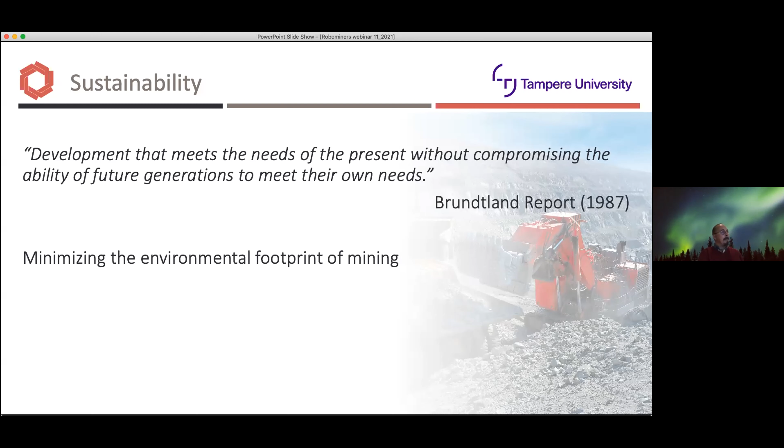So what does this all mean to mining machinery? Of course, if we think about operations the machinery does in mining in general, how to improve the sustainability.

One way is to minimize the infrastructure required to operate the machinery. There is usually in the mine a huge infrastructure which is just supporting the operations in the mine - ventilation, pumping, and so on. One way is to minimize the waste, so that we excavate as little waste rock as possible, and produce as little other waste as possible. Then, of course, minimizing the environmental risks - in general, not bringing into the mine anything which causes some kind of environmental risk.

This also means certain things in terms of machinery life cycle. We have to consider the life cycle more thoroughly - think about the reconfigurability of the machinery, how the machinery of today can meet the needs of tomorrow. If our operation changes, how can we change our machinery to meet new requirements? Then reusability - when our machine reaches the end of its usable life in our mine, what will happen next? Can it be reused somehow, and for what purpose could it be reused?

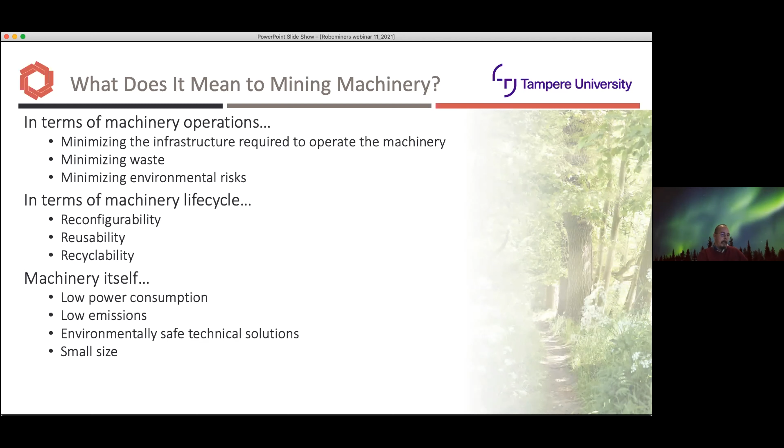One key thing here is also small size. The smaller our machinery is, the smaller tunnels it needs, the smaller veins it could follow, the less waste rock it produces, and so on. How then to achieve sustainable mining machinery?

How can we make them more environmentally friendly? As I already said, decreasing the size of machinery is one thing. Decreasing the size is only possible to certain limits, because the key is anyhow to excavate the rock and the ore, and that requires a certain size. Minimizing the power consumption, using environmentally safe technologies, and also recyclable materials. Improving reconfigurability improves the machine life cycle, makes it longer, and also improves reusability of machines.

But even though our machines may be environmentally friendly, they have to be able to mine profitably. To increase the profitability of mining, our machinery should minimize personnel requirements in the mine, maximize the availability and reliability of the machinery, and minimize the amount of waste rock produced.

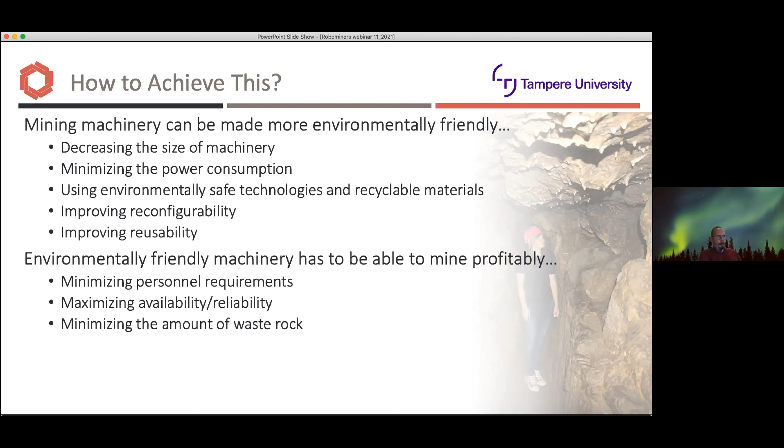In this Robominer project, we are developing one possibility for future mining machinery. We call it Robominer. Robominer is a bio-inspired, modular, reconfigurable robotic miner. It is autonomous, to minimize the personnel requirements in the mine.

The bio-inspiration in terms of Robominer means its locomotion. So the locomotion principle of the Robominer is bio-inspired, but it also means the maneuvering of the robot, the production methods it uses, the sensing technologies it uses, and so on.

Modularity begins from separating the functions and the capabilities of the robot, and building the robot modular according to these. This also improves the possibility to reconfigure the robot for other possible uses.

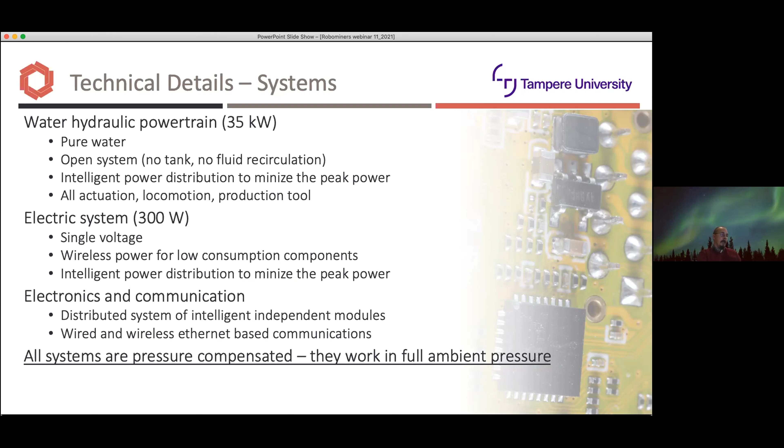Going a little bit deeper into technical details, I'd like to present this screw-like locomotion, which is one of the novel features of the robot. It's based on the quite well-known principle of screw locomotion, this Archimedes screw type, screws rotating against the surface. Vehicles using this locomotion principle have been around for almost 100 years. So in screw locomotion itself there is nothing new, and it's quite well known in principle.

But combining the screw with the leg is the novelty in this one. The screw has certain benefits in comparison to tires or tracks, which are commonly used in mining machinery. The screw is simple, so it has one moving part, which makes it reliable. Especially for machinery operating autonomously inside the mine without possibility for human intervention, this reliability and simplicity is a crucial thing to have machinery which is available when it's needed.

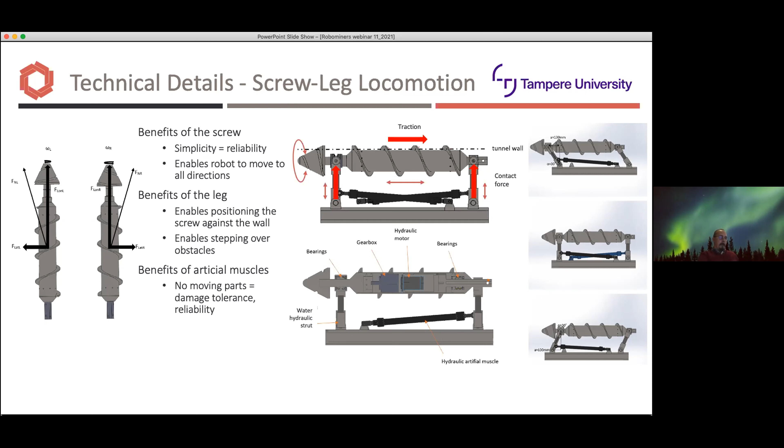The first one is, you said a smaller size means enhanced sustainability. Can you please tell us how small you think the Robominer machine can be, considering structural, locomotion, and hydraulic power constraints? I can actually go back in slides. So in this slide, we have the rough size of Robominer. With two body modules and one production tool module, the length of Robominer is approximately 5 meters. The length of one body module is 1.5 meters, and the diameter is between 735 and 900 millimeters.

So it depends on how far the legs are extended. Weight will be around 1.5 tons. So very lightweight mining machinery. And of course the production rate is related to the size of this machine. Yes, just a comment from my side. It's going to be a small mining machine for the mining machinery scale, but it's going to be a huge robot for the robotic scale.

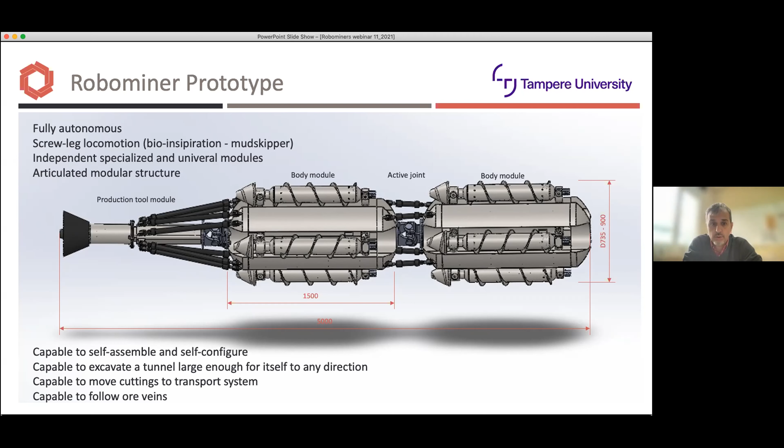Yeah, thanks for the kind introduction. Now we make a large jump actually to the moon. So my talk is about robotic solutions for exploring scientifically interesting places. The first question that we should address is why do we actually want to go to the moon? And there are three major parts. First of all, if we get more insights into the moon, we can analyze and understand the genesis of our solar system and also of our own Earth.

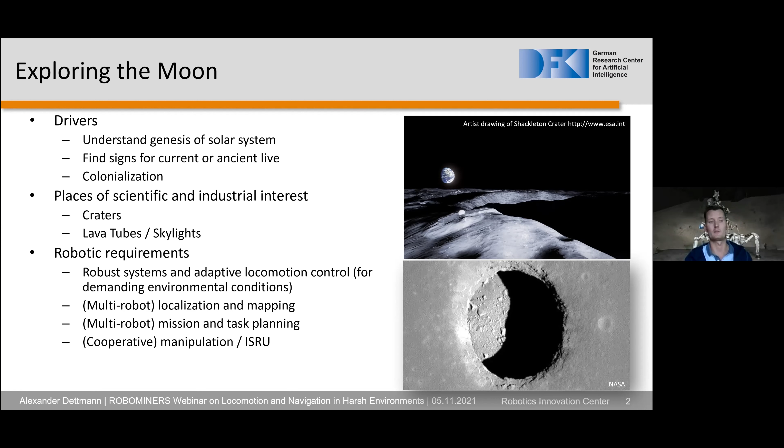Then in order to get down these craters, you need to cover steep inclines, and you always have the possibility that you have some hidden pitfalls or some unconsolidated terrain, so that you need to react in real time to these changes in the environment. And that's why we developed these multiple locomotion concepts.

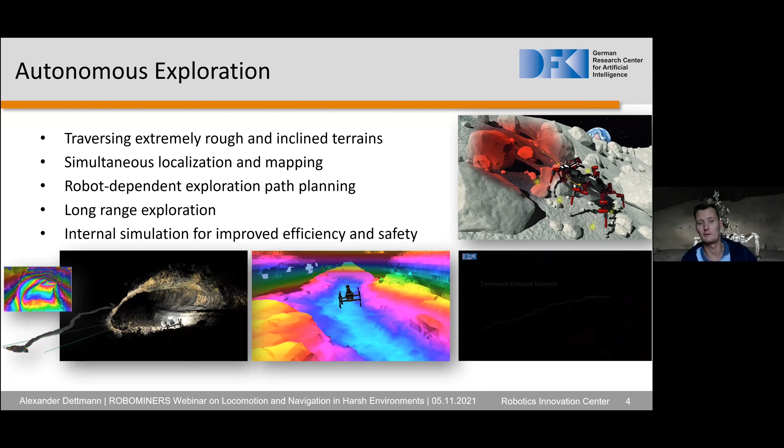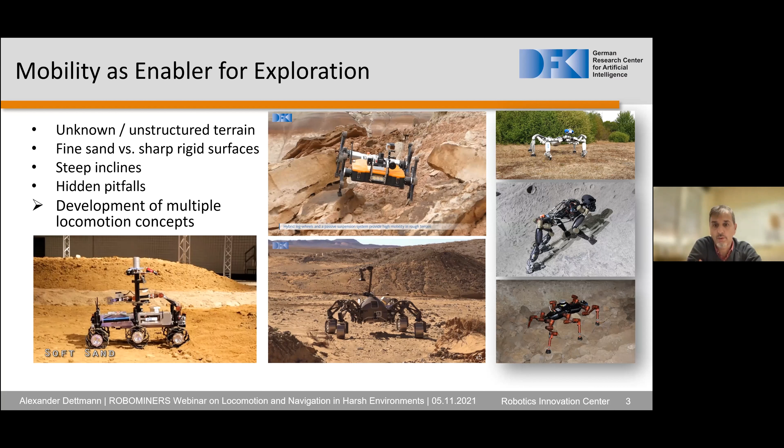Okay, so there's one last question also about maintenance somehow. If the robot has some kind of malfunction during exploration, how do you plan to retract the malfunctioning robot to avoid littering space with junk? Yeah, actually this isn't really our primary focus, but I think in almost all current missions there's not much idea of taking the systems back to Earth. You try to get some samples back, but bringing the whole system back is not really possible.

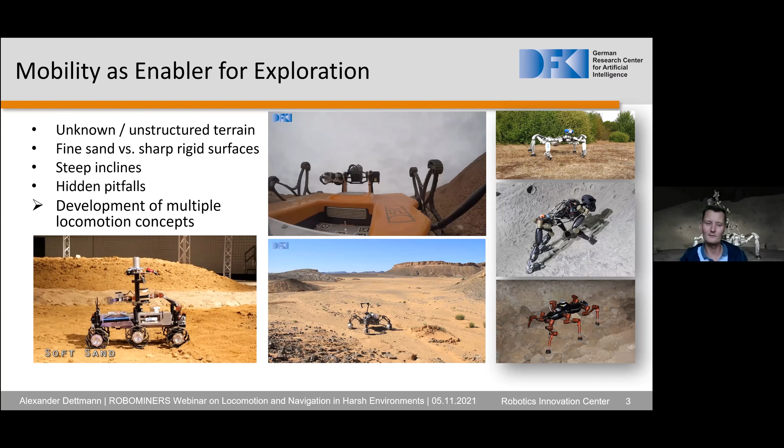For example, if we consider this scenario of lava tube exploration, the actual mission behind this would be a 1-day lunar mission, which corresponds to about 14 days on Earth. That means you get out of the lander, go to the crater rim, analyze everything, do the descent, and then use the remaining time, like 1 or 2 days, to explore the lava tube before nighttime comes. Because if you then want to survive the nighttime, that poses much more constraints on your systems.

So you will leave some waste there, I guess, in almost every mission. That's currently the situation, yeah.

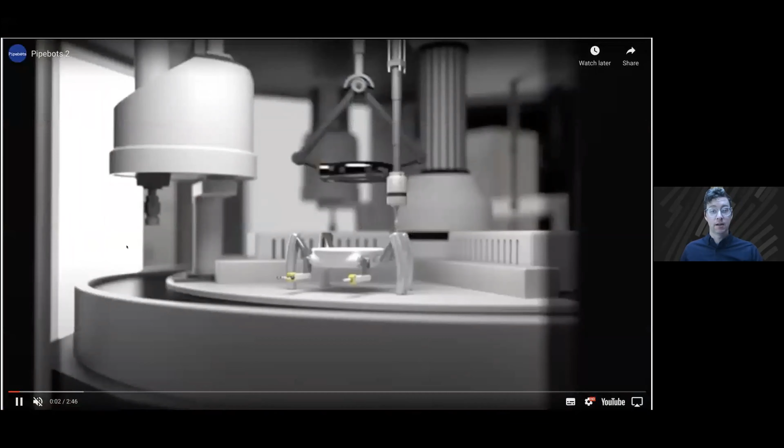Thank you, okay, so I'll begin. Great, yeah, so we're from the Pipebots research project. What the Pipebots project is about—I'm going to play this video and turn the sound off—is building robots to do pervasive sensing in buried pipes, so in water pipes and in sewer pipes.

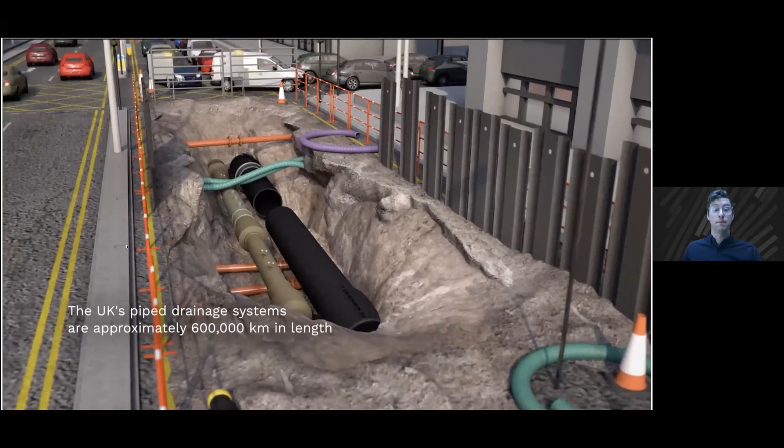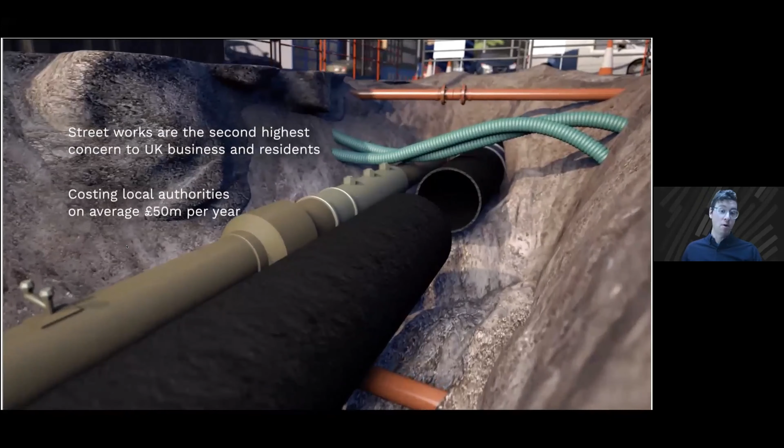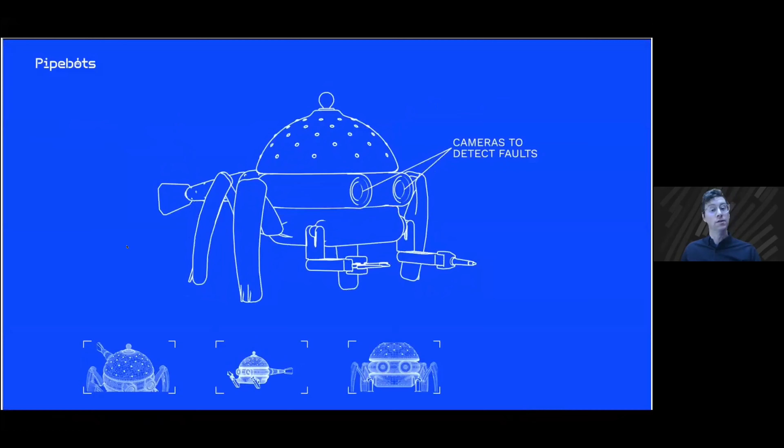Just in the UK, there's something like 1.5 million road excavations a year to fix broken pipes, and it costs at least £5 billion per year to deal with that. You can see the stats on the screen here. Part of the problem is that you don't know leaks have happened until they've happened, so you can't anticipate leaking pipes. Also, the accuracy of finding the faults is problematic because of old records and no way of really identifying from inside the pipe where the leaks are.

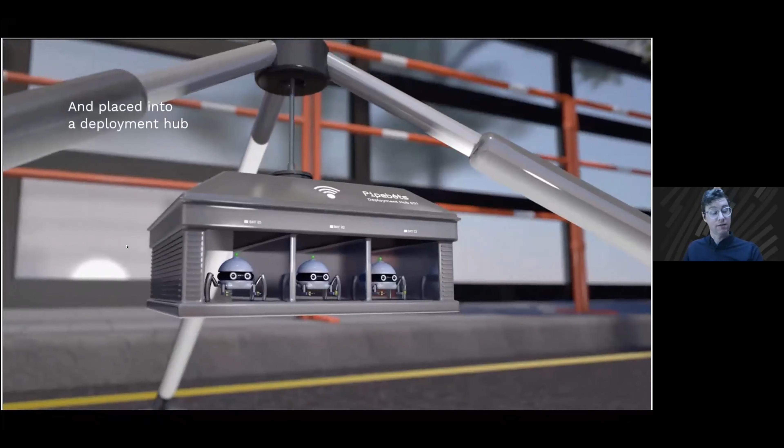So the idea is to develop these miniature robots that can go into the pipes and monitor condition over time, anticipate failure, and then also identify the locations of those failures or potential failures more accurately, so the holes can be smaller and there's less disruption.

So this is the sort of mock-up, and the project itself is divided into a number of research themes. I'm working on the navigation theme, which is about localization and mapping. Nick is working on robotic systems, but we also have themes for developing novel sensors, particularly ultrasonic sensing technologies. We've also got people working on the communication and power problems within the pipe environment, and then also teams looking at control strategies for traversing the pipe network, but also for getting the robots around tricky obstacles within the pipes.

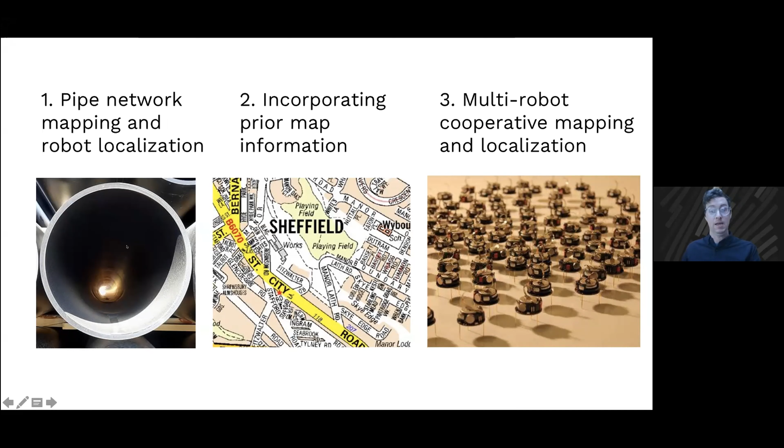So I'm going to talk about the localization and mapping, and Nick's going to talk about the locomotion. Our approach to this problem is taking existing localization and mapping methods and applying them where they can work in the pipe. We also want to exploit and incorporate prior map information, because we do know a lot about where the pipes are supposed to be and where the manholes are. And then the final thing is to use multi-robot cooperation.

So the problem with simultaneous localization and mapping, which we work on, is sort of a chicken and egg problem. You want to build a map and you want to localize yourself within that map. So if you imagine you're moving from A through C to B in the map on the left, then when you get to B, you realize that you're near where you were when you were at C, and then it can form into a coherent map. So that's basically the process we want to go through for these robots within these pipes.

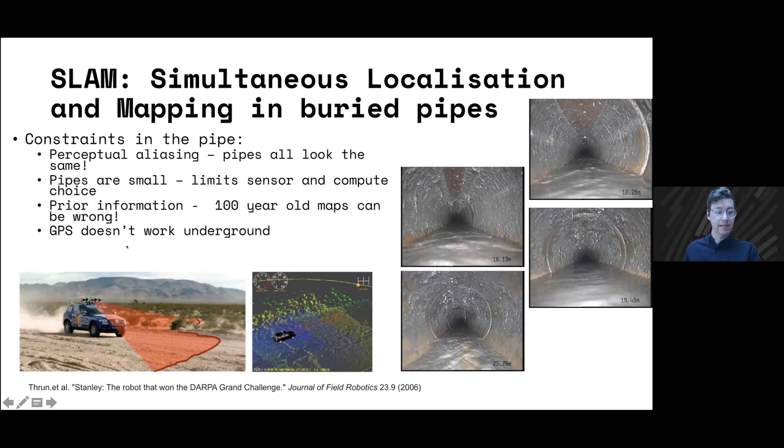But typically the way you solve this type of problem, and for some of these other projects where you have quite large robots, is similar to what's shown at the bottom here. This is the Stanley robot that won the DARPA Grand Challenge. So you have laser LiDAR sensors and lots of compute power, but we can't use that type of technology because the pipes are too small. Some of the diameters are only tens of centimeters across, and we want the robot to be a few centimeters across. So we don't have that sort of technology.

And then the other problem that we have in the pipe is perceptual aliasing. So you can see on the right hand side, a lot of the pipes look the same regardless of where you are. These are all different locations. So there's that problem to crack. The prior information is wrong because some of these maps are 100 years old, especially in certain parts of the UK and in Europe. So they just aren't correct anymore. And then the GPS won't work underground, which is something that you could usually use for these sorts of things.

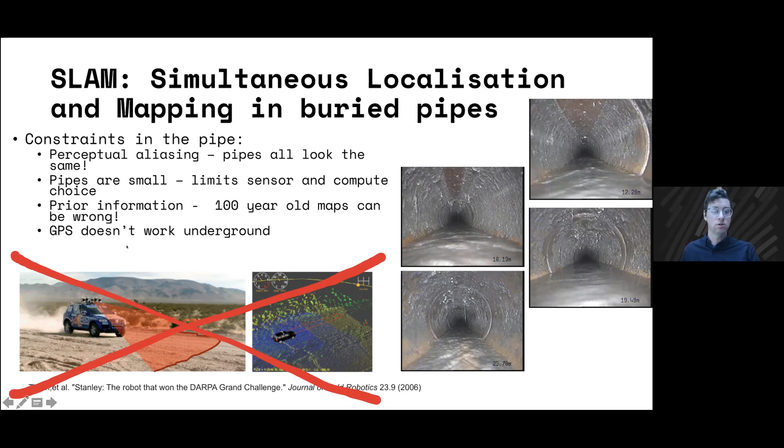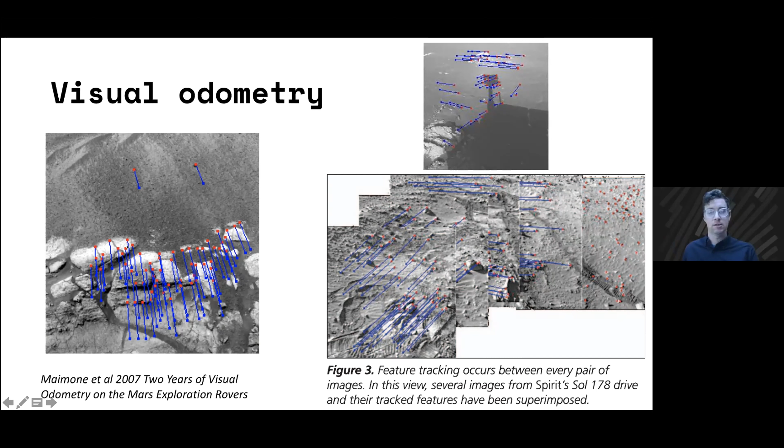So similar to the previous talk, or taking inspiration from some of the research that would have gone into it, we're focusing on visual odometry, which has been used on Mars rovers and other very difficult, impoverished environments, because cameras are small, cheap and robust. You basically take a picture, move the camera, take another picture, and you can work out how the camera has moved with respect to the world by how the image has changed from one frame to the next. And so we've applied these visual SLAM methods to live sewer pipes, data from live sewer pipes, in preparation for when we get the data from the real robots.

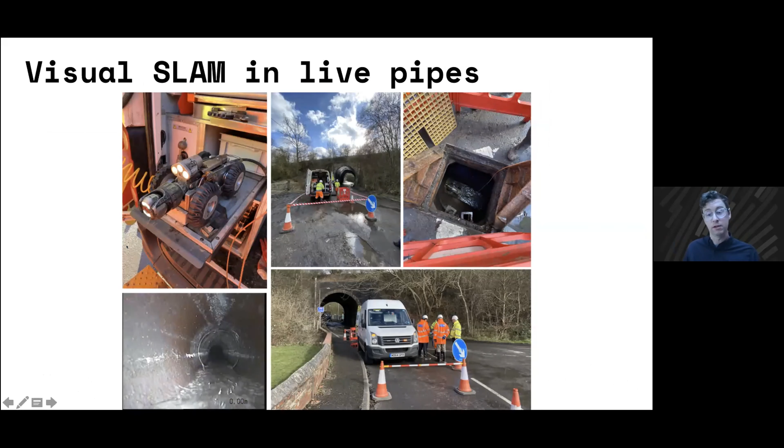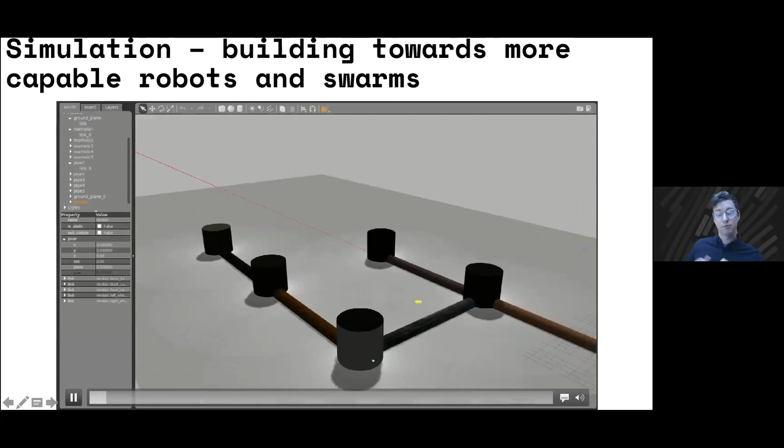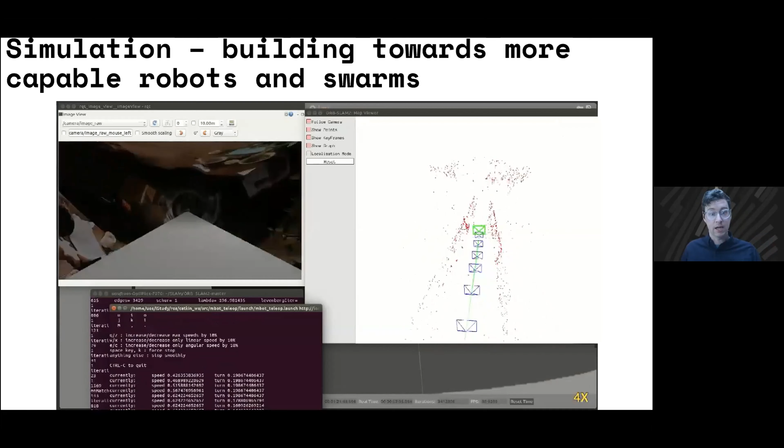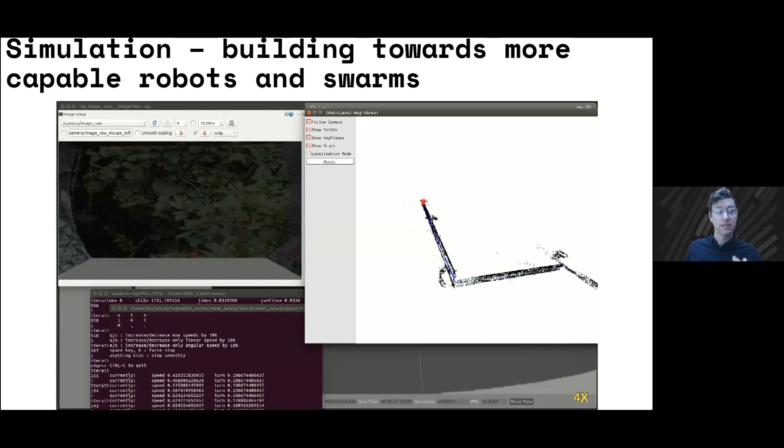The other thing we're working on is doing work in simulation. This is slightly less interesting, but we need to bridge the gap between the cameras that exist and the mobile robots that Nick's going to talk about. I'll skip this example in the interest of time. It's a similar type of thing as before, but now we have a simulated environment, and we're simulating going into these manholes, detecting those, and towards the end of the video, reconstructing a more complex network of pipes that reflects where the robot has been. We're developing these algorithms in anticipation of the robots that will be able to traverse these pipe networks in future, which Nick's going to talk about now.

So that's my bit. Nick, you're up. Cheers, Matt. Thank you. If you could go on to the next slide, please.

So yeah, I'm going to talk to you briefly about miniature pipe robot locomotion, mainly in the context of mobility within pipe networks, as that's what we're designing for. But I imagine there'll be a fair bit of crossover in mobility challenges between manufactured pipes and kind of natural pipes, which you'd probably see in a mine environment.

As Matt said, I'm part of Theme 3 of the PipeBots project, which develops miniature autonomous robotic platforms. The primary focus of any locomotion system is to transport a payload, usually an array of sensors of some description, around the pipe network. Unfortunately, there's no one-size-fits-all solution suitable for all pipes, so usually there's some form of compromise dependent on the expected pipe environment.

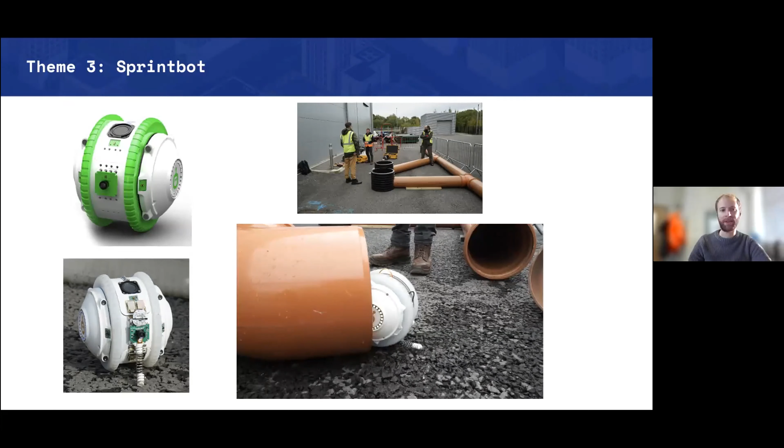Okay, so the first of these platforms is called the Sprintbot. It's given that name as it was developed over a month-long technical sprint to produce a robot platform combining technology from all the different themes. This robot was shaped like a ball to allow it to turn within the pipe, with wheels surrounding the body to reduce the chance of the robot beaching. It's also able to travel in pipes of 240 millimeter diameter and is fitted with an array of sensors, cameras, and speakers to allow other parts of the project to use it for their work. It also has the capability of being either tethered or battery powered. Building and testing the Sprintbot allowed us to collect highly useful data for future work to build upon in other areas of the project. Next slide, please, Matt.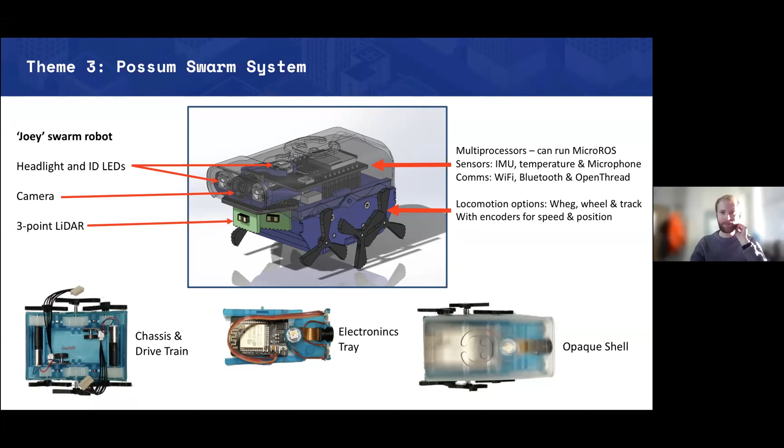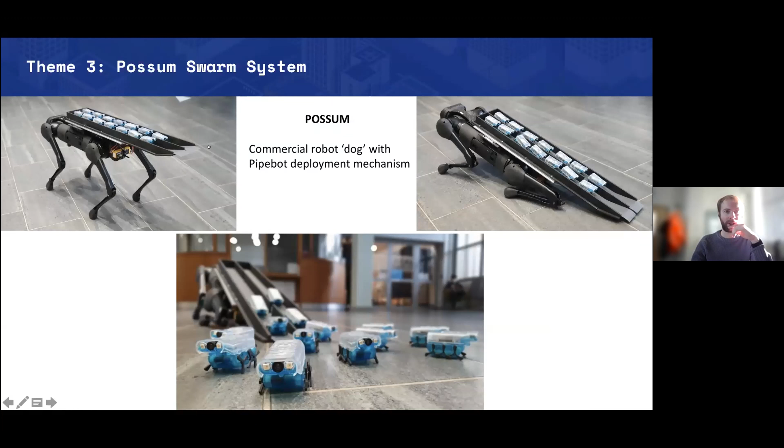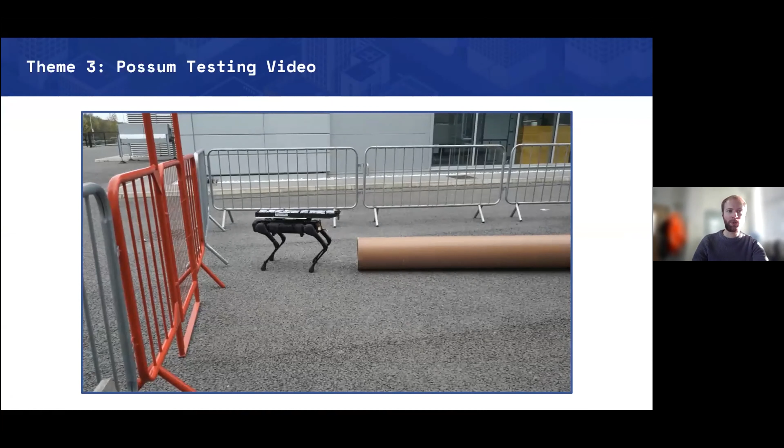So one of the deployment concepts we've explored is using a commercially available robot dog acting as the possum, or the mother robot. If you go on to the next slide, I think there's a video of this system actually operating. So the intent is that the quadruped robot can transport the swarm of smaller robots through a larger pipe or rough terrain, and then deploy the swarm to explore pipes of a smaller diameter.

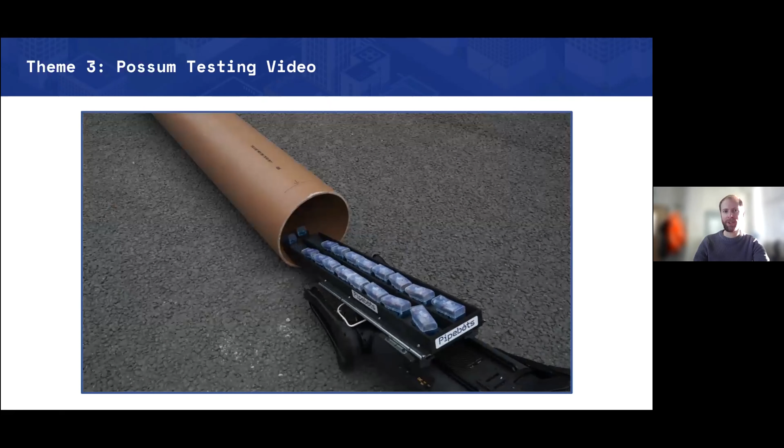Traveling in a pipe with a curved surface is quite challenging, especially for something this small. Some of our colleagues within Theme 4 of Pipebots have been working on control algorithms to assist with this task. The great reduction in size compared to the sprint bots allows us to have multiple platforms in a small section of pipe at the same time, which can move over and past each other. They also pose less of a risk of creating blockages and becoming stuck on certain pipe features.

So you can see them in action.

Once they've completed their mission, they then go back to the mother robot and they can be collected or packed up and transported away.

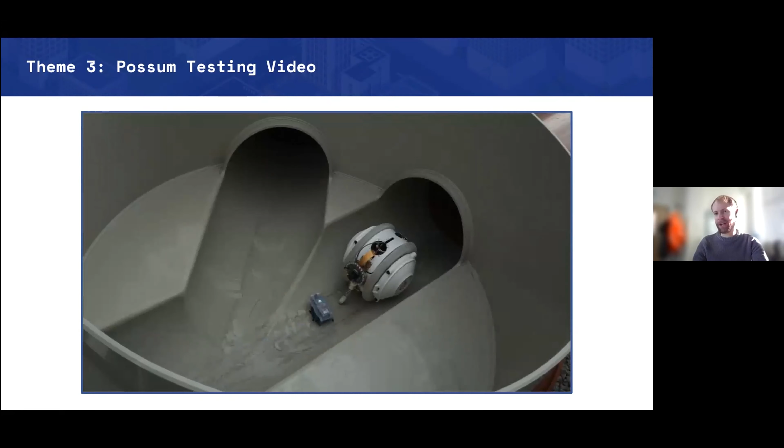Yeah, so you can see them being collected up by the mother robot.

So kind of future ways of further developing the mechanical aspects of the robots and improving the locomotion: a few things we're looking at are features such as expandable whegs, which would allow the legs to fold away within the body for protection, and would allow different ride heights depending on the kind of obstacles we're going up against.

In sewer systems, there are also quite large drops to connect different pipe networks. Therefore, designing a swarm that could remain fully operational after large falls would be beneficial. We've also been looking at quite an ambitious thing, giving each robot a mechanical interface to connect to other robots within the swarm, to allow different maneuvers and allow them to overcome bigger obstacles together.

So yeah, that's it from me. Thanks for listening, and I'll be happy to answer any questions.

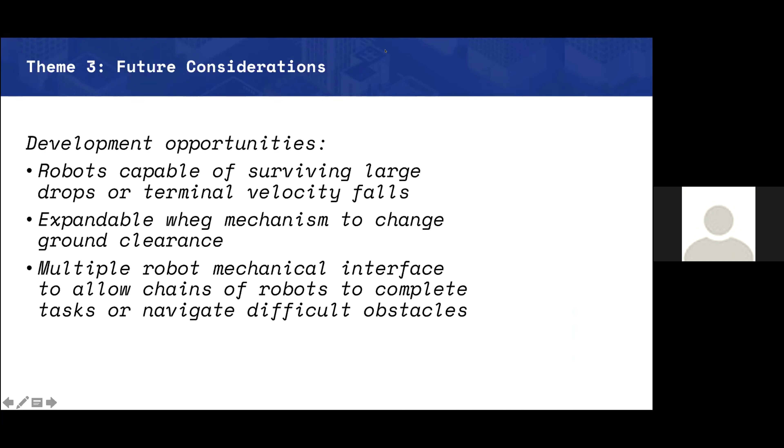In your animation, it seems that robots work like a swarm. If that's the case, is there a central control unit, or is there any other approach or option?

Yeah, it's an interesting question. It's still an active piece of research in the project, how we're going to go about doing the swarm aspects of the control and the mapping. At the moment, we've only been working on the single robot case, and what Nick was showing with the mothership delivering them and deploying the robots, at that point they would have no coordination. But as I mentioned, we've got people working on the communication aspect and on control, so there are applications for doing more efficient searching of the network.

And also for using the swarm for communication—if you can only communicate over short distances, you wouldn't have a centralized controller. You would have local robots working independently, but aware of their neighboring robots. Because if you have a centralized controller controlling all the small robots, you're going to come into lots of communication problems.

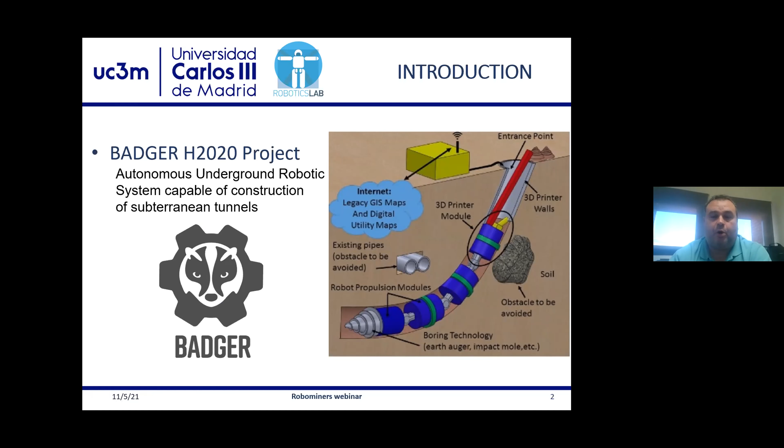The Badger underground robot is composed of 4 different modules: a drill head module, 2 service modules with the same function, 2 joint modules, and a wall support module. The drill head module integrates a drilling mechanism based on rotary drilling technologies to construct the borehole, and the joint modules provide the propulsion and steering capacities of this robot.

The service modules, including the robot, have a clamping mechanism which consists of airbags that inflate and deflate to fit the robot to the borehole. And the last module is the tunnel wall support. These modules spray the walls of the drill bore with additive material to construct pipes for wall support.

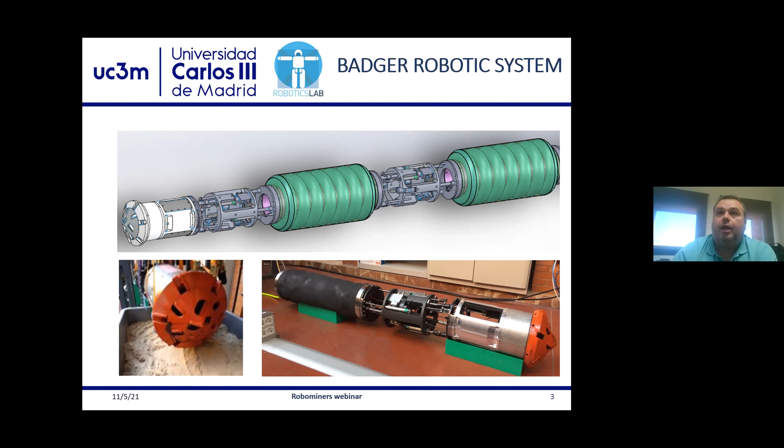The motion of Badger is constrained by the tunnel that is being drilled. Badger cannot move sideways and must always move forward in order to steer. So the robot cannot go in other directions; it moves forward and steers to the top, to the bottom, left and right, but always forward.

Our worm-like motion is generated using the combined operation of the clamping mechanism and the joint modules. Also, this clamping mechanism reacts to the torque produced during the drilling. So they provide the force needed to produce the advance of the robot and avoid as well the roll motion of the system.

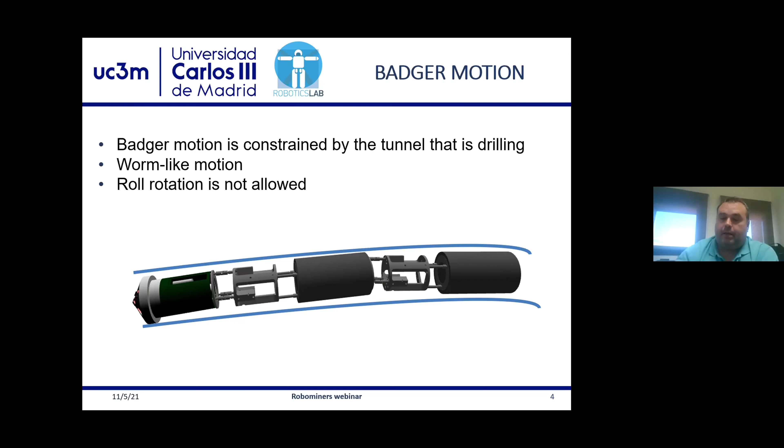In order to perceive the obstacles that the robot can find during its movement, as sensors we have 3 GPR antennas in the drill head with a field of view of 120 degrees to the front. And they are installed in the diameter of the drill head, not in the front. The disposition of the antennas covers the 360 degrees of field, and we can view all the surroundings.

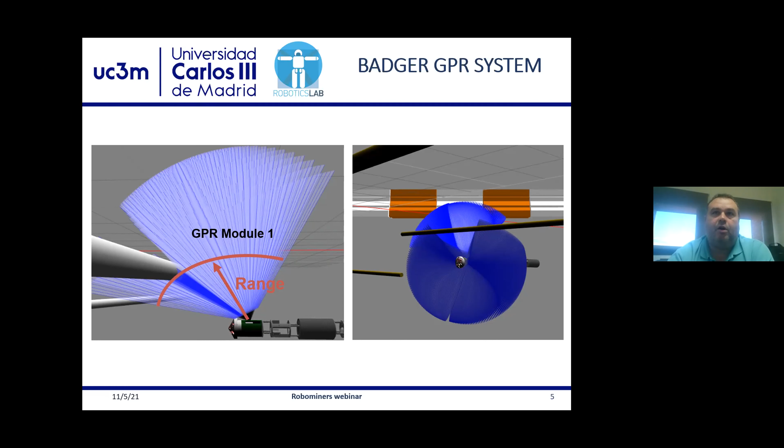A single measurement from the GPR, that is called an A-scan, can provide data about the distance of the antenna to the closest object that falls within the field of view of the sensor. In this presentation, we present a solution of the SLAM problem for this robot. We want to determine the position of the drill head and simultaneously map the subsurface while the robot is drilling.

For that purpose, we use the odometry estimations and the range measurements from the 3 GPR systems. These GPR units do not provide dense sets of readings, just 3 ranges with a big field of view. So the GPR range readings are grouped in different sets. The grouping of GPR scans process consists in gathering the range measurements of the GPR ring and the odometry while the robot is moving.

In the figure, the grouping process of 1 GPR is shown. The green arrows represent the displacement between 2 poses where the GPR measurements were taken. The range measurement at each pose is represented by the pink cone. The displacement between 2 successive poses and the range measurements are stored. With this we have the data needed to transfer these range measurements to the reference frame for each group. Once we have two groups of scans, we can use them to correct the pose of the robot.

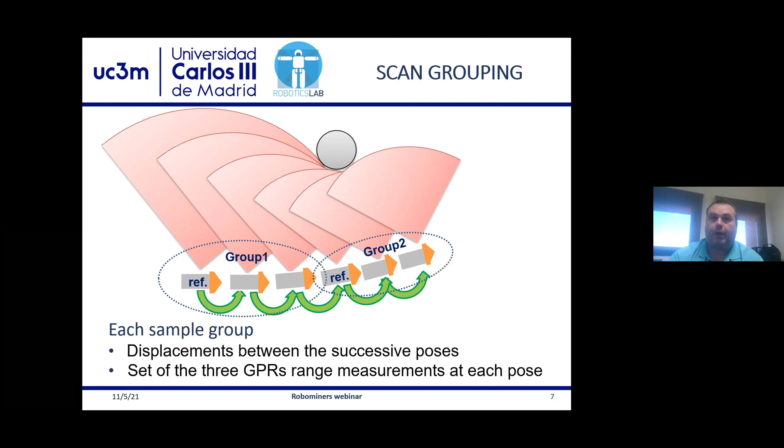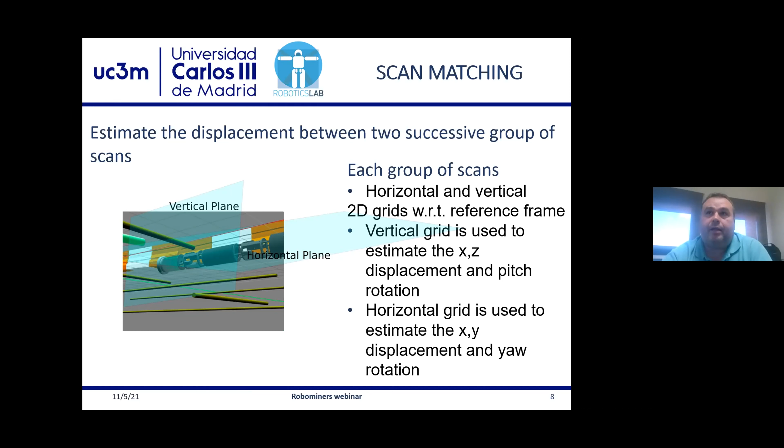The scan matching method is used to estimate the displacement between 2 successive groups of scans. Given a reference group, a new group, and an initial guess of the displacement between them, the objective of the scan matching method is to obtain a better estimate of the real displacement. Our method combines 2 perpendicular 2D grid maps to estimate the motion of the drill head between two groups of scans. The vertical grid is used to estimate the displacement in the XZ plane and the pitch rotation, and the horizontal one is used to estimate the XY displacement and the yaw rotation.

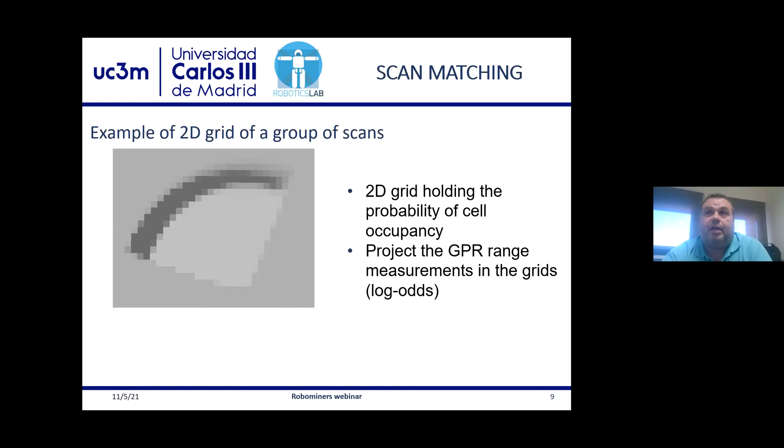For example, for a group of scans of the 2D vertical grid shown in this figure, the probability of each cell of the grid represents the occupancy. Initially, all cells are assigned an initial probability called prior. This probability is estimated using the log odds ratio, a simple inverse model of the GPR. For the cells inside the field of view of each GPR scan, at distances between 0 and the neighborhood of the range, the inverse model has a value smaller than the prior. In the neighborhood, it has a value bigger than the prior.

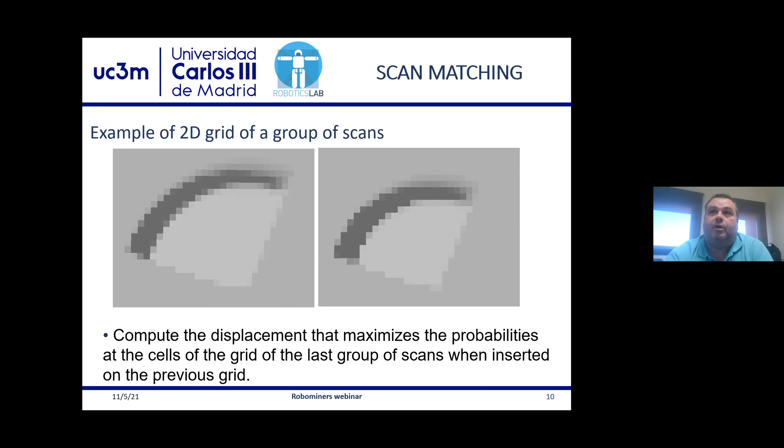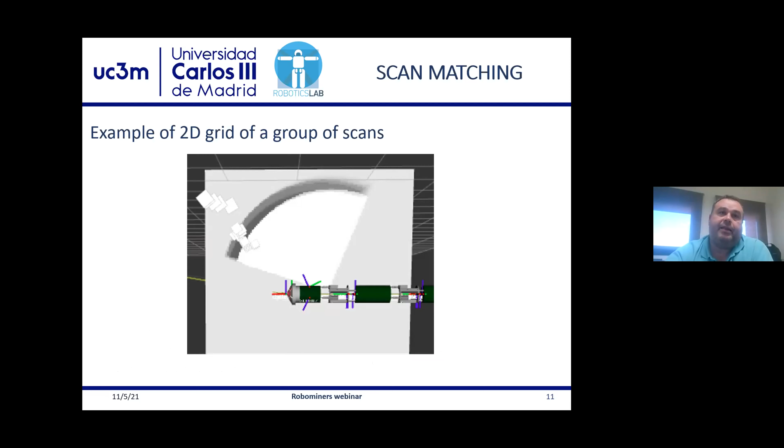So another 2D grid is created in a similar way for the current group of scans to estimate the relative displacement. The displacement is computed to maximize the probabilities at the cells of the grid of the last group of scans when inserted in the previous grid. Then here we can see both 2D grids aligned after the scan matching process, shown in a darker color. So we can have the probability of all the space.

This process is utilized in a particle filter to estimate the trajectory of the drill head of the robot and also estimate the surrounding maps, given the groups of scans from the GPRs and the odometry. A set of potential trajectories considered by the particles, and the map associated to each particle, is used in this filter.

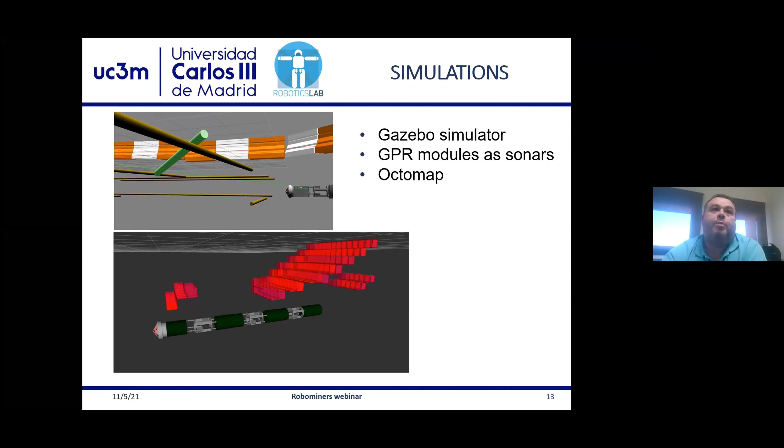So we use all these probabilities inside Gazebo and the simulation in order to estimate these trajectories and to allow the robot to move in the underground environment. We use the GPR information and use this data in order to perceive all the surroundings, with an error in the front of the robot, because we don't have the GPR just in front of the robot. The GPR sensors are located within the radius of the drill head.

So even with this allocation of the GPR in the simulation, we are able to locate different piping systems, estimate their positions, and produce a path to allow the robot to move underground with success. This was developed in simulation because of the pandemic. We couldn't test the system in real underground conditions.

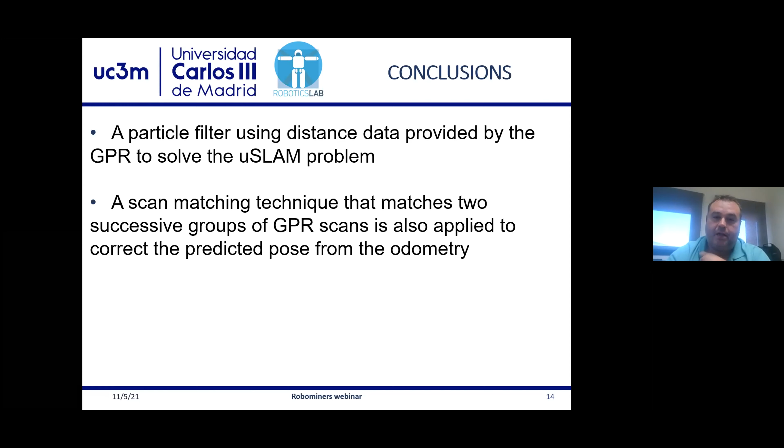So the first one is, how do you extract the rock and the soil when it's excavated? Yeah, we have an industrial vacuum system that is attached to the robot. In the drill head, we gather the cuttings inside, and with this vacuum system, they are extracted and transported through a pipe, a tube, to the exterior.

Thank you. So the next question is, how do you prevent the excavated tunnel from collapsing? Yeah, one of the parts of the robot I mentioned in the first slide is like a 3D system to construct a tunnel to provide the wall support. When the robot is moving in this worm style, at the same time, with this system in the back of the robot, we can construct the tunnel.